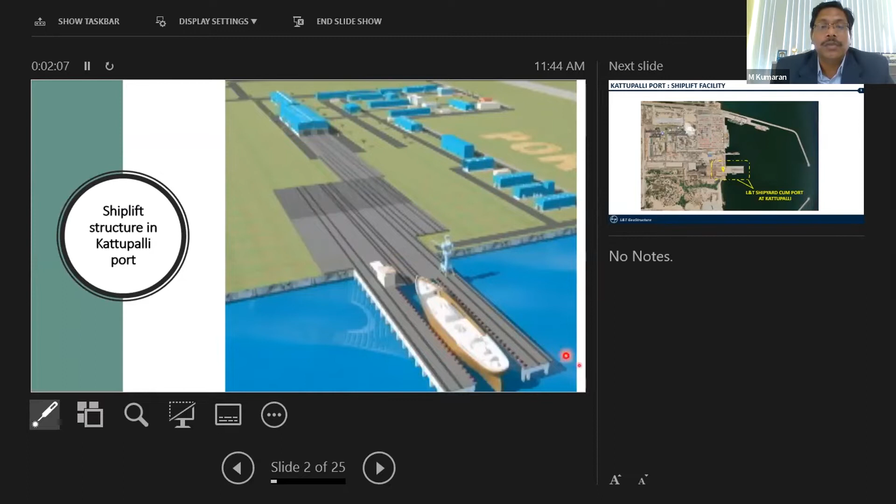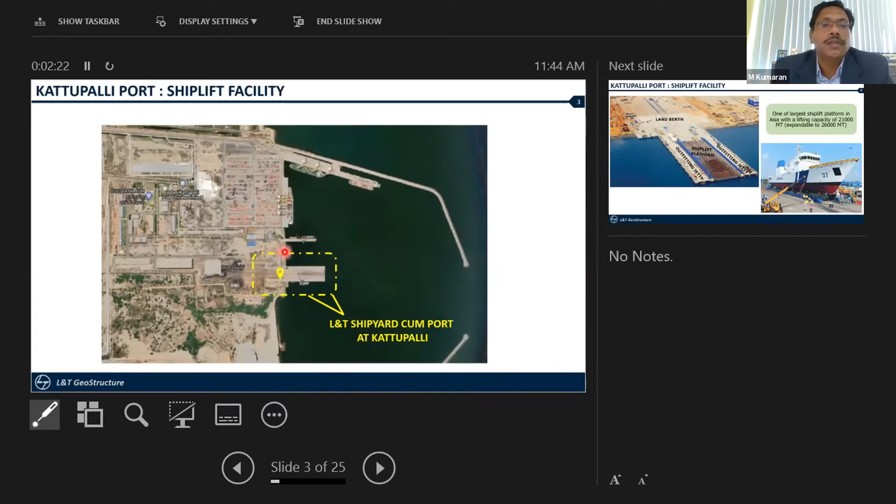This is the Google Earth map where you can see the entire port, including the breakwaters and port structures, with boats all along, and this is the location of our ship lift area.

Just to give a brief introduction - any geotechnical engineer, when giving analysis and recommendations, must first understand the structure, its intended purpose, and how it is going to perform. Various performance requirements, loading patterns, and loading requirements need to be understood, so we can provide a better solution.

Here are the constructed views - this is the ship lift platform and this is the land berth. On the right you can see the completed picture where the ship has to be moved. This is the steel platform, designed to take care of a capacity of 21,000 metric tons, which means it can be expandable up to 26,000 metric tons also.

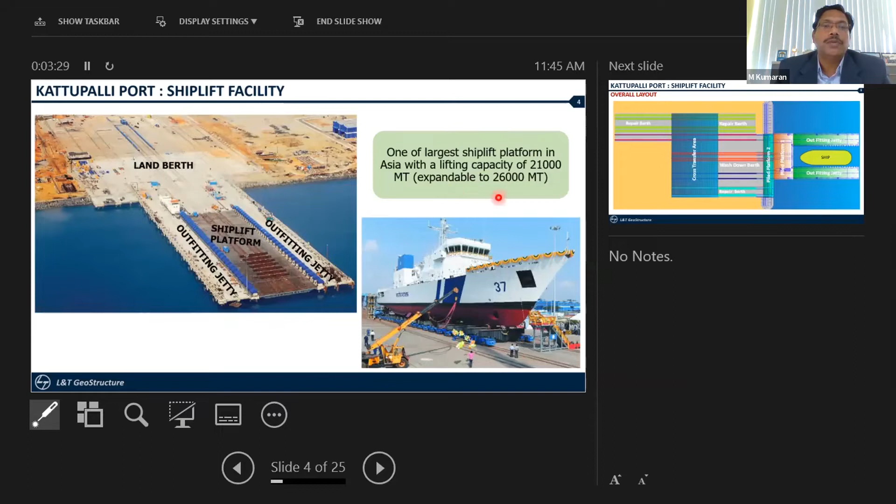Next, I'll show you the process. The ship enters the ship lift location and is lifted by the platform, then with the cradle supports it is moved to the land location, and can then be shifted perpendicularly also.

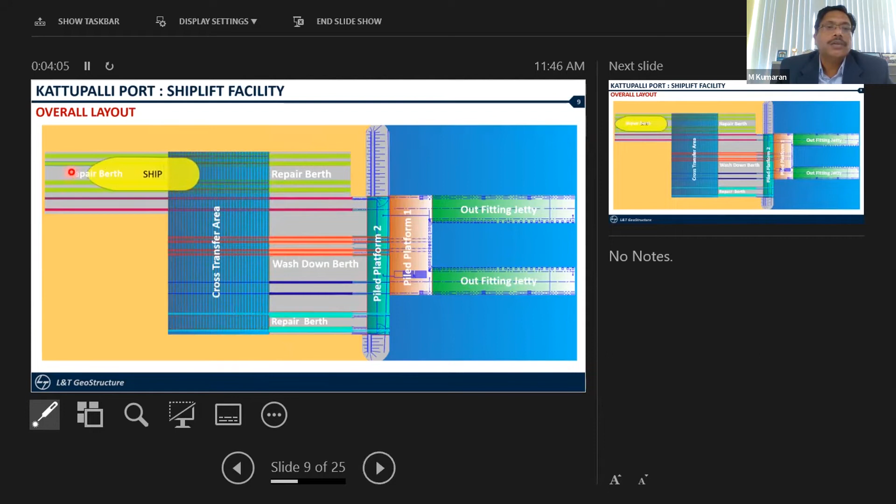Then it has to be taken to its position. This looks like a car moving, but imagine a 20,000 ton vehicle having to move onto the land, shifted from the marine environment.

I'm going to talk on two areas: one is the ship lift platform foundation, and the other important point is the land berth, which is a kind of ground-supported raft that has to take such a huge load. These are the two areas I will cover.

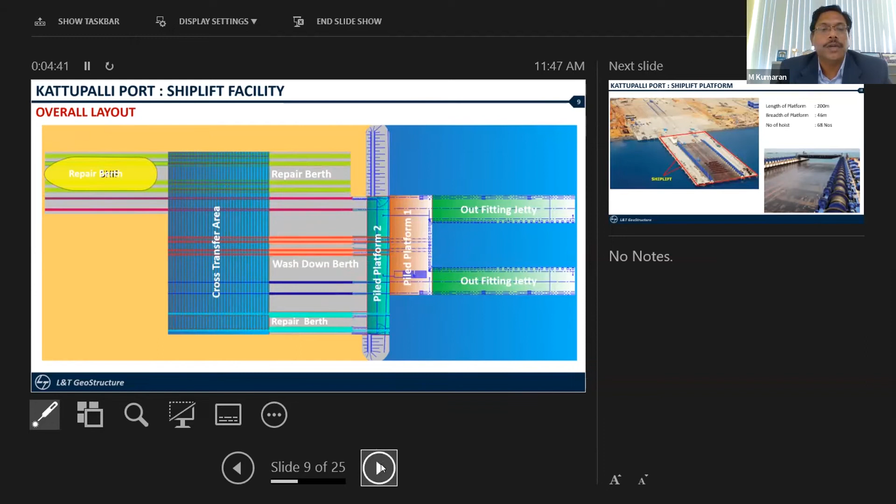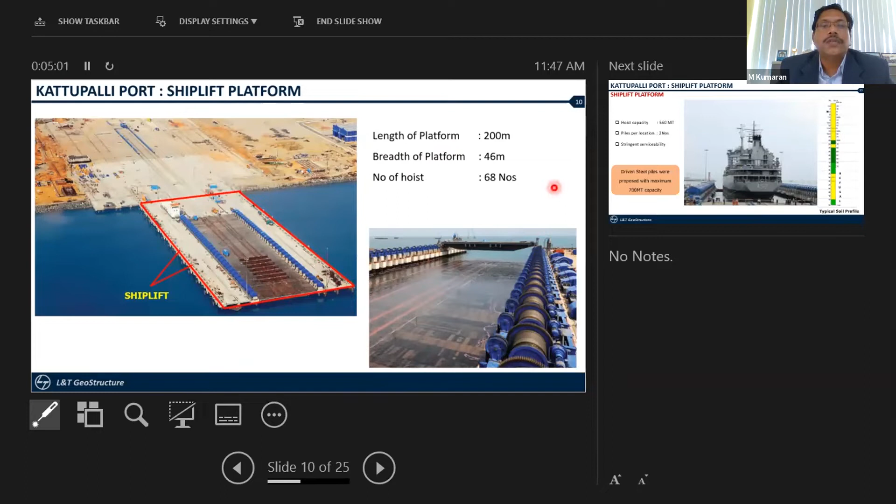This platform has a length of 200 meters and a width of about 46 meters. It is a vertically lifting platform with a series of hoists on both sides, 68 numbers in total, each having a capacity of 560 tons.

This can be lifted vertically by suspended ropes with a lift length of 18 meters vertically. This is the function of the entire ship lifting operation.

Now, these ropes lift the steel platform up and down along with the ship. This means the ropes, which are directly suspended, have to be supported by piles. The piles must be rigid enough to have very minimal settlement, otherwise the functionality of the ropes at different locations would be difficult.

So that is the most critical phase of this particular structure. In the initial phases, it is very evident that we can achieve such stringent serviceability by providing steel piles, a driven kind of pile, wherein all the steel piles can be driven to the refusal strata, whereby we can know even during the driving time itself what resistance it offers and what kind of settlement it can undergo. So that is the major crunch in this kind of structure, where steel piles are universally adopted for this ship lift platform.

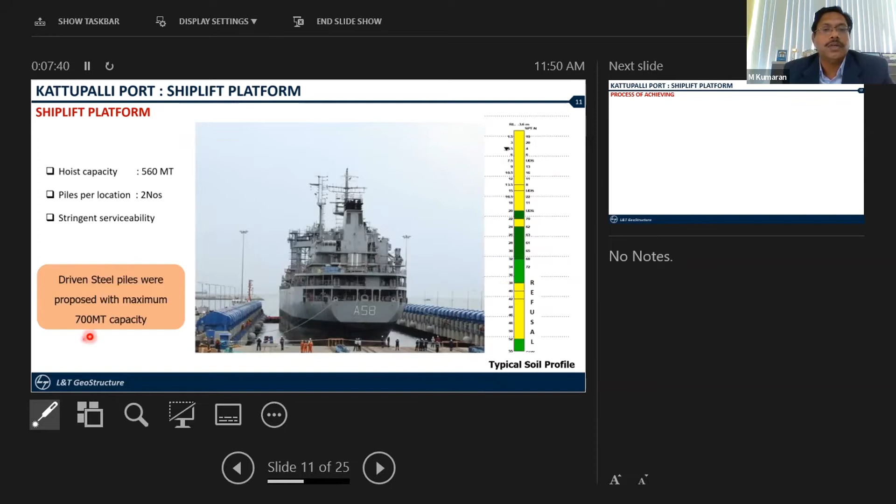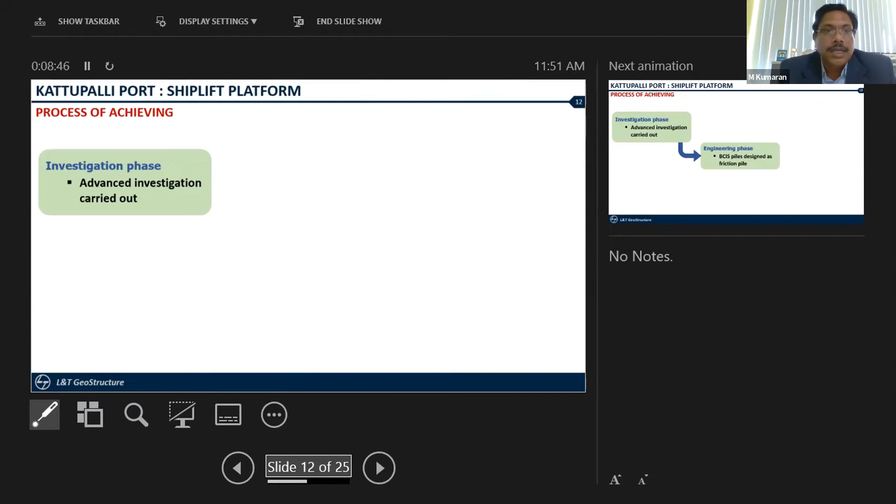So this is the process which has actually been done. Basically the investigation phase, where we have to assess the geotechnical parameters, and we have executed advanced investigation with additional details for calculating the parameters in depth.

And then we have gone into the engineering phase, wherein we have carried out sufficient analysis to find out the capacities. And the one prime decision we have taken is, we will allow the pile only up to the friction capacity. We will not take the end bearing behavior, as we very well know that to mobilize the end bearing we need higher settlement. Hence we limited the pile capacity such that it will only mobilize the friction capacity. So this is the engineering phase we have decided.

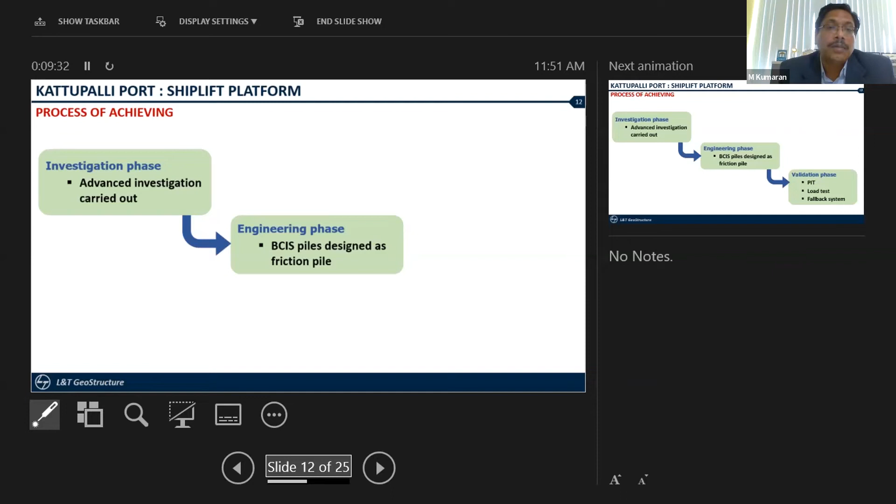Now moreover, after the engineering phase, we also have to look into proving that our capacities are okay. So even though an initial pile load test was carried out and proved the capacity, however now the series of piles has to be done.

So what we did is we took an extensive validation phase wherein a pile integrity test was carried out for all the piles, and in addition we did a load test on all these hoist piles alone, 100%, to check whether all the piles are taking the capacity. So this is what we carried out, and we also had a fallback arrangement in case after the load test anything underwent more settlement. We had a fallback system also such that it can be plugged in to take care of the entire process.

So that is how we devised the entire geotechnical phases into 3 phases, starting from the investigation, then the engineering, then the validation phase also, so that we can look from start to the end of the construction, which means the geotechnical engineering role never ends at giving the recommendation alone. He has to relook into what can be seen till the end of construction, how it can be mitigated. Also he has to overlook and see, and then suggest and incorporate in his system while implementing itself. So that is the kind of role we have developed and then adopted.

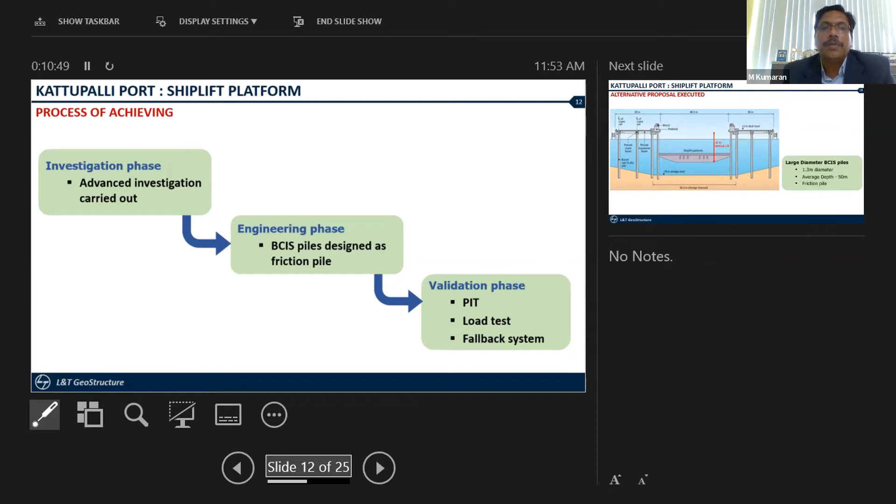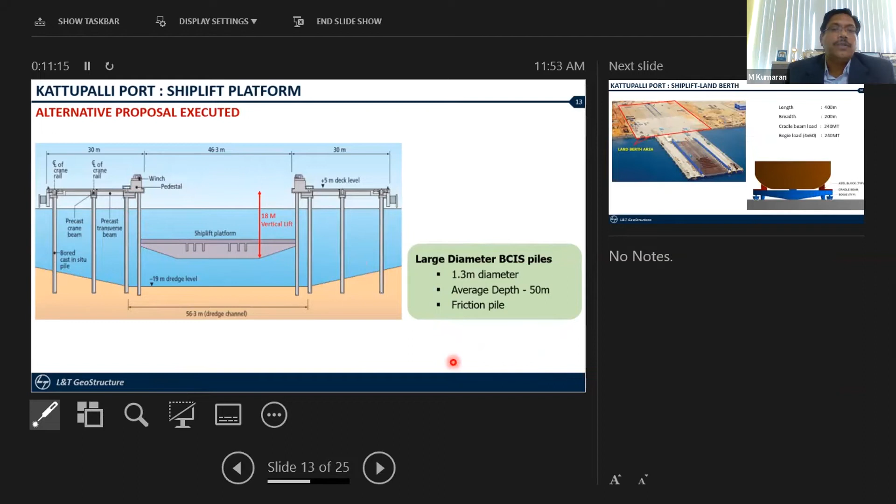And this is the final cross section which has been done with the cast in situ piles. This is the winch which is called hoist, which is going to lift this entire steel platform vertically. It's like a marine platform which is operated below water, and it is going to be lifted for 18 meters of vertical lift. And this is the concept we have adopted for this marine piling system, which has performed.

The other part which I was telling you about is the land berth, where the ship has been lifted and has to be brought to the land for various activities.

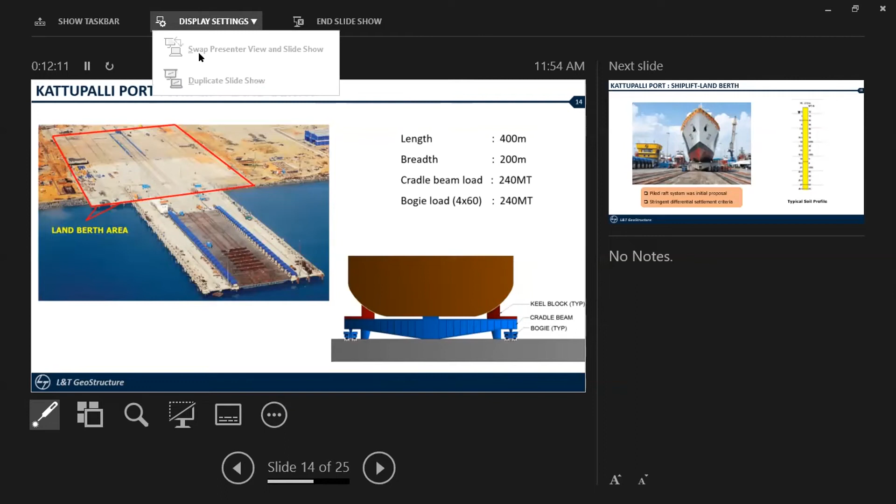I'll close it and share again. There's a display setting issue - some swap or view option, display settings on top. Let me check that. The presenter mode is on, so we need to switch it off. It's not editable for me, it seems blocked - they need to give permissions. It's okay, you can continue.

So this is the second portion. The ship has to be brought onto land and then taken for various activities. Again, if you see this cross section, the ship has been placed onto this cradle beam, a steel beam which supports the ship. Then the bogies are on either side, where it can be trawled like a vehicle and moved.

If you look at the cradle load, each cradle load has a 240 ton concentrated load, and the bogie has 4 wheels each, 1 meter apart in both directions. So it has 60 tons per point load, and has to take 240 tons on either side. This is the kind of loading involved.

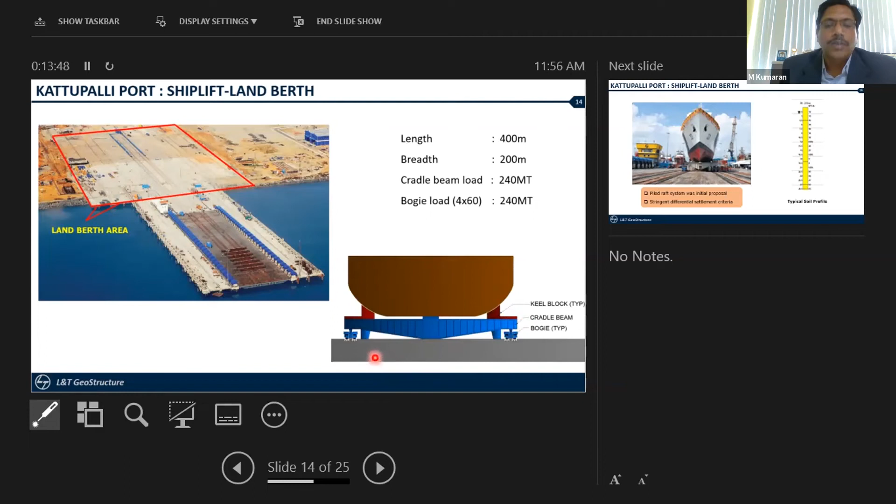We needed a stringent differential settlement criteria, not just total settlement, because differential settlement determines whether the ship will climb up or not - that's more important than total settlement. With that differential settlement consideration, we relooked at things because time and cost of the project were going up.

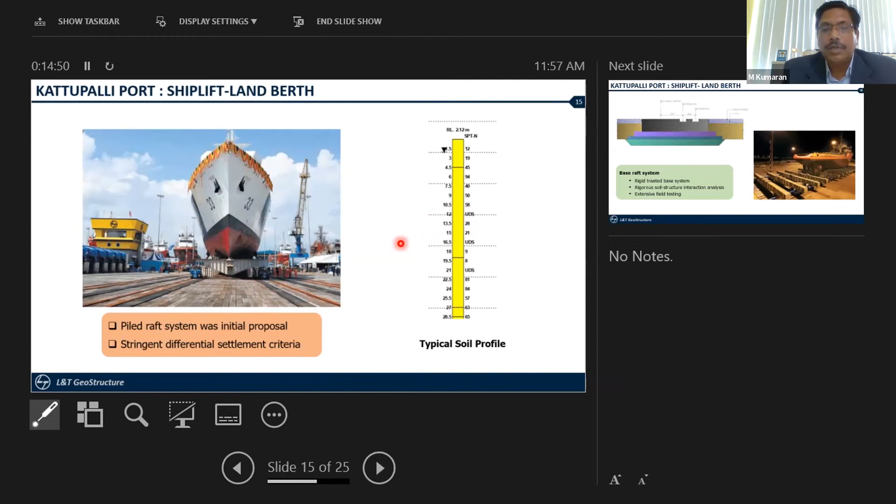In addition, we had extensive finite element analysis along with in-situ testing. Rigorous analysis was carried out on soil structure interaction to understand the behavior - where it would go and what would happen. Finally, we adopted a rigid treated base concept, eliminating the pile, after understanding the various levels of problems and suggesting this workable solution.

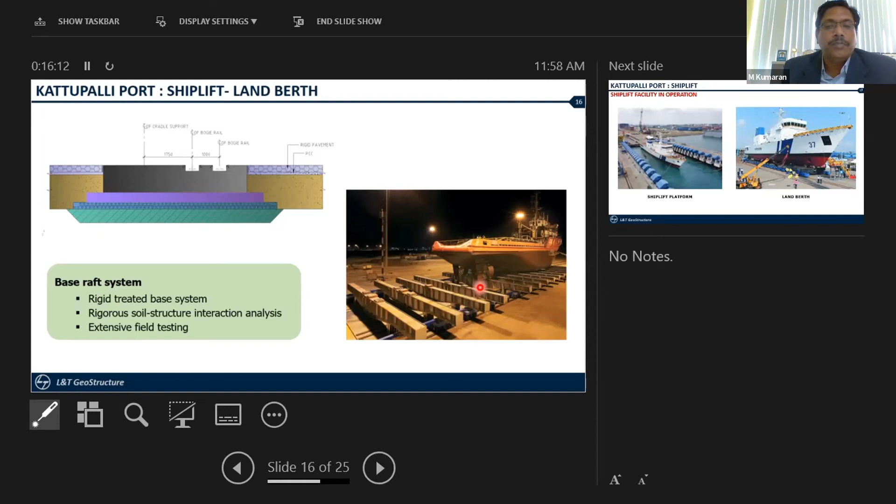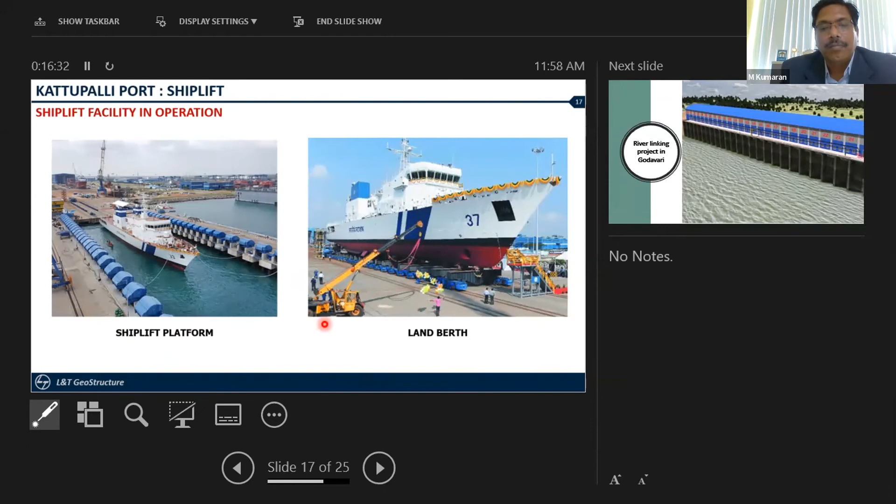The next project is the river linking project.

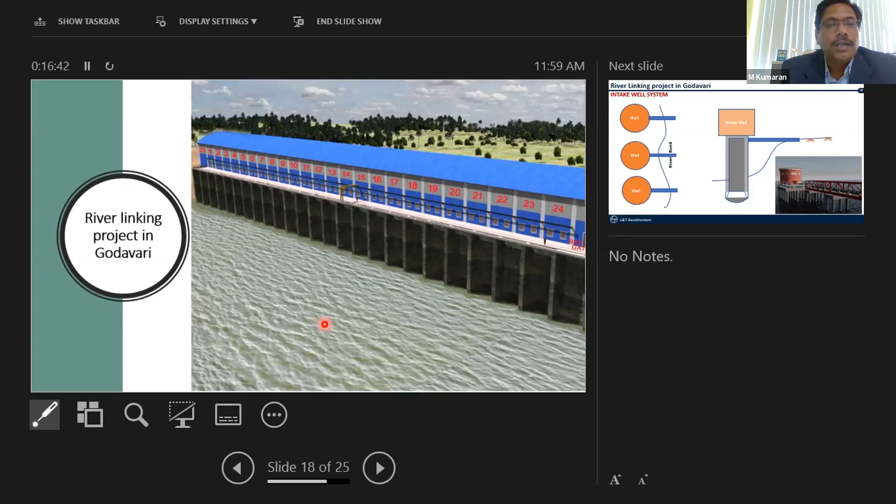River linking project wherein we have to construct a river intake structure. Okay, this is one of the

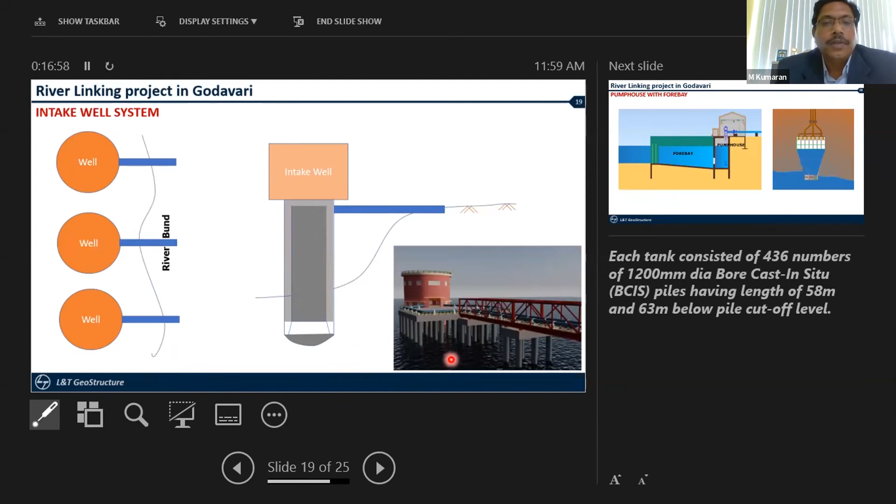classical conventional pumphouses which can be constructed in our country with the type of well foundation. Circular wells can be sunk into the river, or the second option is your typical forebay and pump house construction. So this is what it is actually.

Then we relooked at the construction of such kind of structure, which will go into a timeline of 24 to 36 months, depending on the type of structure. Why? Because we have to be sinking the large diameter well just to go down, and the second thing is the construction of pumphouses.

We need to go for a proper excavation system, because it is at the edge of the river. All the water seepage and stability of this excavation needs to be taken care of to construct this kind of pumphouse.

So the challenge posed to us was whether this can be constructed in the shortest period, because this is a river linking project and the water supply has to be faster. How much faster? That is what the construction industry, the client, has told us - what is the viable solution which can deliver the water at the earliest. So that is the challenge given.

Actually, the construction industry again relooked into the geotechnical engineering to see whether any other solution is possible which can be carried out in the shortest period. So then we were able to look into the various options.

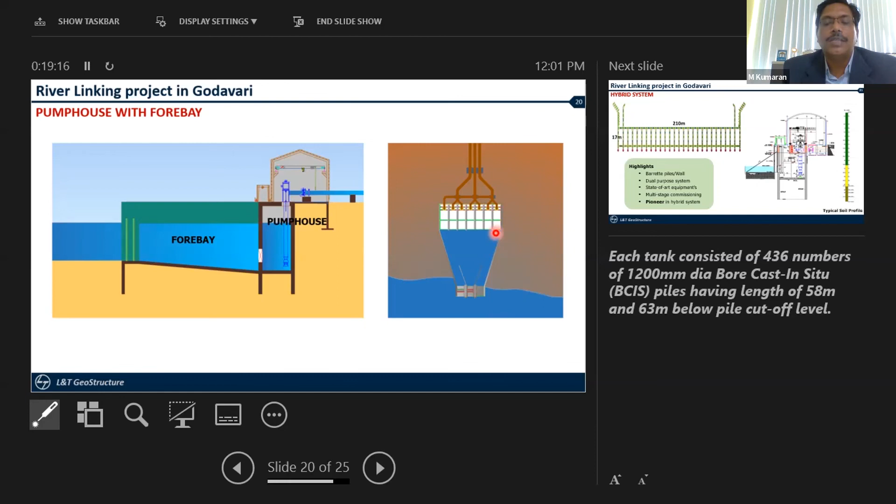The second thing is, since it is a water retaining structure, we have adopted overcutting of the existing panels such that it can have a better performance on the joints.

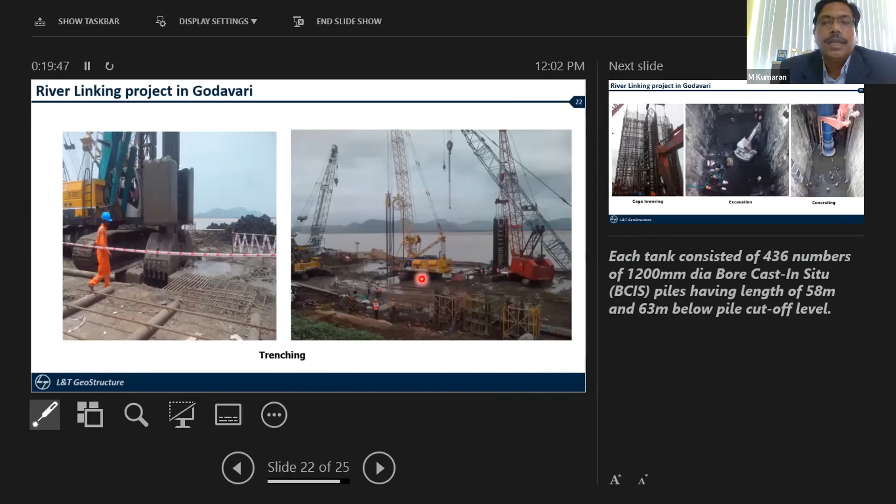So these are some of the pictures where you can see the construction activities with the kind of technology that made this possible, and we were able to achieve a record time of 1 year for completion of the entire system.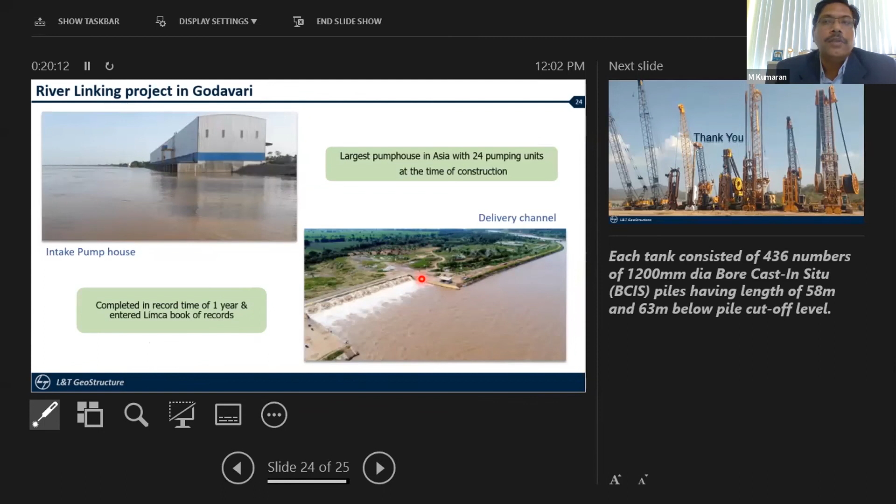So this is the first time such kind of implementation has been done, and moreover, this also gave an added advantage to the client that the 24 chambers can be done in a staged manner also.

Maybe 4 chambers can be constructed and water can be delivered if the downstream pipeline and other facilities are ready. So that was also done - multi-stage level water delivery. That is the greatest advantage of this kind of multi-cellular intake system with the diaphragm walls.

Thank you very much, sir, for a very insightful presentation on the foundations for the ship lift platforms, and also your second project, the river linking. It is really appreciated that it was completed in a record time, that is 1 year. That is really appreciated, sir.